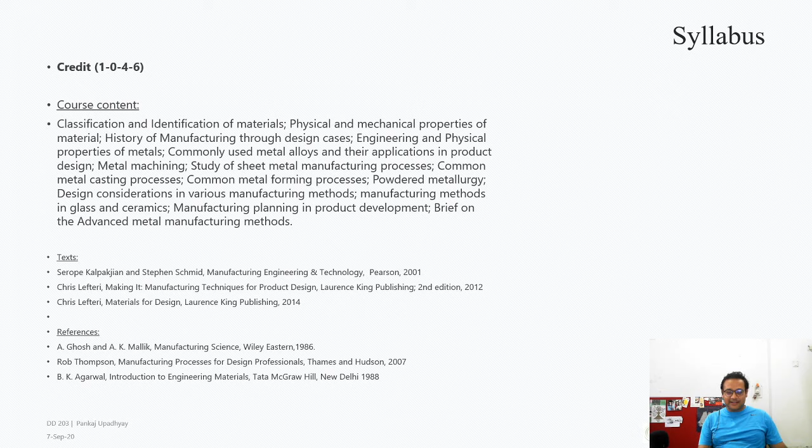Okay, let's move on to the plan of the course. So this is our schedule of the course. First and foremost, we have five 3-day modules.

So 3-day modules - obviously we will not do a whole full day of work. We'll have 1 hour of lectures, probably like this. If this seems to work, then we'll do it like this only. And what we will have is we'll try to cover certain topics in each of these modules.

Like the first module, we'll try to look at properties of materials, idea about tolerances, and we'll look at machining. Unfortunately, machining is something which really needs hands-on experience, but...

...somewhere in the mid ground, during our last to last batch - the batch who is currently in the 4th year - during that time, what we had done was we had gone through the whole workshop, and we had made some videos of the machines, how the machines work and what they look like, and we also made some videos about hand tools.

Jason was very kind enough to help me with the video shoot. So he made these videos and edited them, and I also think he's uploaded these videos in his YouTube channel, so subscribe to Jason I guess. And so these videos we can go through slowly, and we'll try to decipher what kind of tools these are and what uses they have.

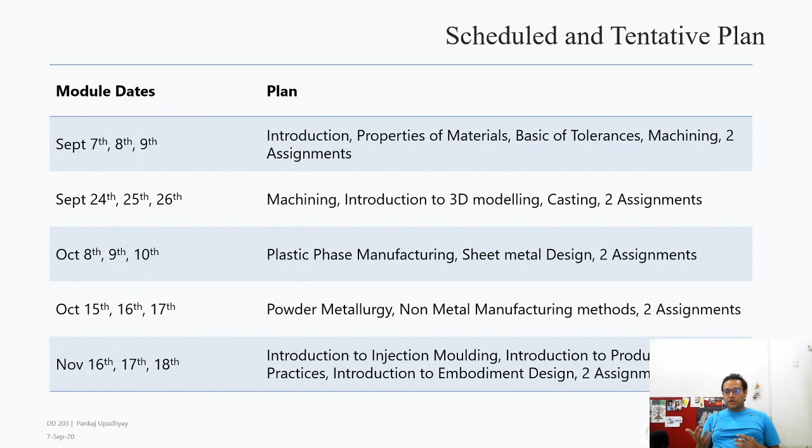So this is what I was thinking - instead of getting to do hands-on in the workshop, I have substituted that part of the learning process with an introduction to 3D modeling. I know there are other courses in your next semester which will introduce you to 3D modeling in depth, but here we will use this as a launch pad to get familiarized with the software and to also use it in some of the assignments.

So this will always give you an edge when you are doing some other kind of assignment in other courses. So we'll do 3D modeling a little bit - I'll do a tutorial session of one of these softwares. We'll do Fusion 360 because it is really accessible, really powerful, and it is free. How many of you know about Fusion 360?

Can we have some hands-on? Bhavika is asking if we can have some hands-on after you're back in campus. Oh no, that is Chaitanya asking. Chaitanya, make your own Gmail ID, man. What the hell?

Yeah, we can. I think this whole Corona thing, the effects of it, is going to spill over to the next semester also. We might have Saturdays working, so I can't really give you a promise that we will definitely be able to do this. I can't force you to do this, right?

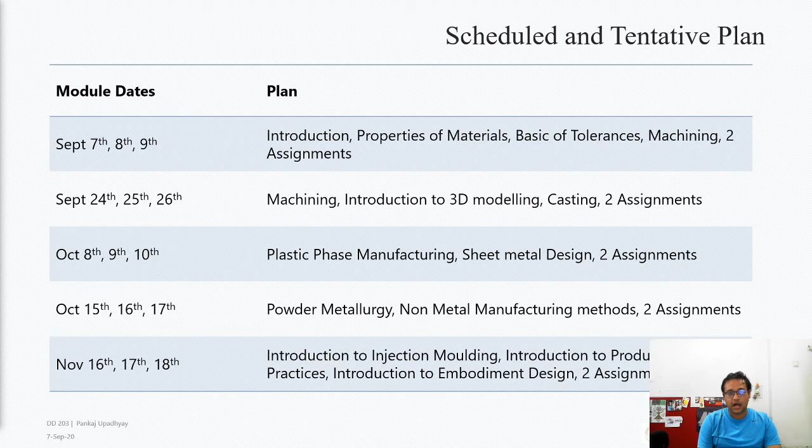We will have 2 quizzes sometime, and these will be like surprise quizzes. I still haven't figured out how we will do quizzes, because I honestly don't want you to Google it, since it'll be very simple questions based on whatever I've discussed in the lectures. Now that the lectures will be online, it'll be very easy for you to scrub through some videos and get the answer, but I don't want you to do that. I haven't figured out how I would enforce that, so if you have some ideas, do share.

I am right now thinking of using OneNote. I'll show you how it works.

Second, the AS grade will be based on overall performance. Even if you are scoring high marks because of submission of assignments and all of that, it doesn't guarantee you an AS grade even if you've done all the assignments. It will be based on your overall performance across all assignments. So if I see that out of the 10 assignments you've done 8 of them excellently, better than the rest of the class, or better than the best average or best submissions, then I will probably grade you an AS.

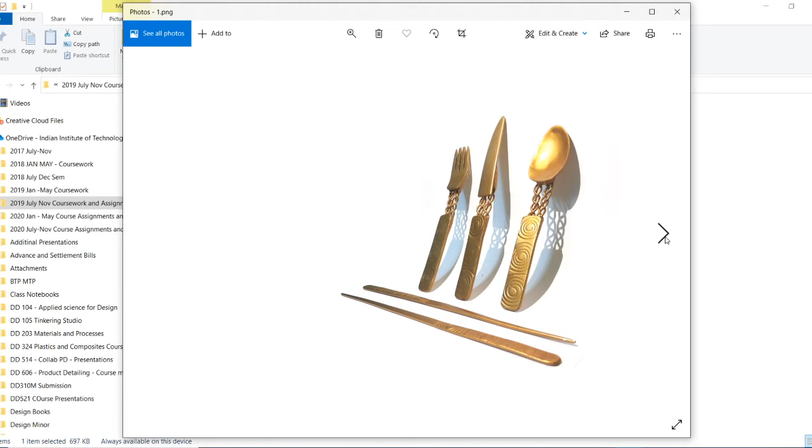So yeah, I'll show you what they've done in one of the assignments. Can you see this? Can you see this? Yeah, so this is a cutlery set that they've done. So let me pull up the other one.

Okay, so this was made in the workshop. This was one of the first kind of assignments, or rather I think the second assignment or something. Yeah, it's the day 3 assignment. So here this is like a spoon, and the idea was that you would make a cutlery set. I hope people can see, right?

You make a cutlery set of a spoon, a fork, and a knife, right? And they did something like this. It was quite interesting. This is one of the designs. There are many others, and they are very, very unique.

Then there are some assignments which were done for just understanding machining, like this one. This is, I think, a top. I don't know, you can see it. Against my shirt, I think you can see it, right? So it's like a machined top which you can just spin like this. These are the kind of simple assignments that we generally do.

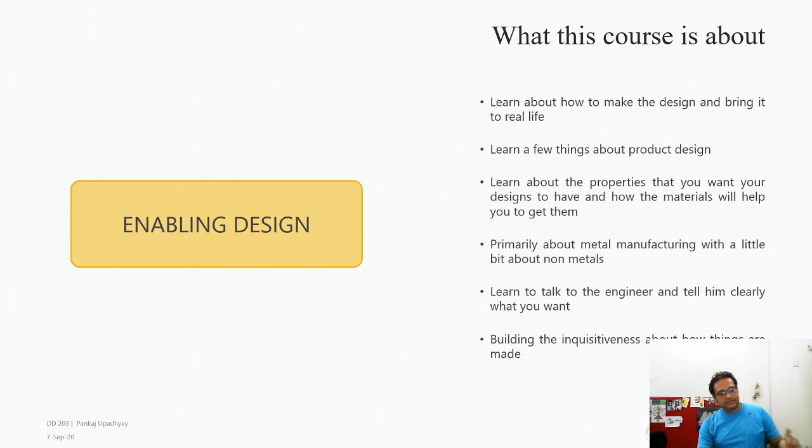So now we are getting properly into the territory of the class. Let's talk about materials. What are the different kinds of materials there are? Typically in the class I won't even say a word on this slide - I mean, what do you think there are? That's the kind of question I would raise, and I'll just go through the slides.

I think everybody knows this, right? Yeah, yeah, Chaitanya - algorithm is the problem. Yes.

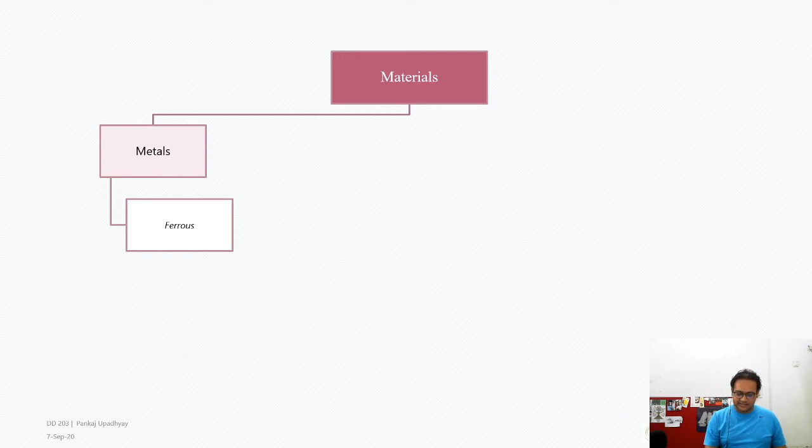So let's run through this - everybody knows this. What are the kinds of materials that are there? Some of you will have heard about some of these for the first time. Metals - there are two kinds primarily that I think you're all aware about: ferrous materials and non-ferrous materials. Non-ferrous are the ones which do not have Fe - Fe is iron. Iron is such a godly material, a bit of hyperbole, that it deserves a category of its own. And then there are others - copper, aluminium, and so on.

Although we are seeing aluminium more and more in the world lately, steel is something that drives the world. Steel is based on iron - it's an alloy of iron. So ferrous materials deserve a category of their own, that way.

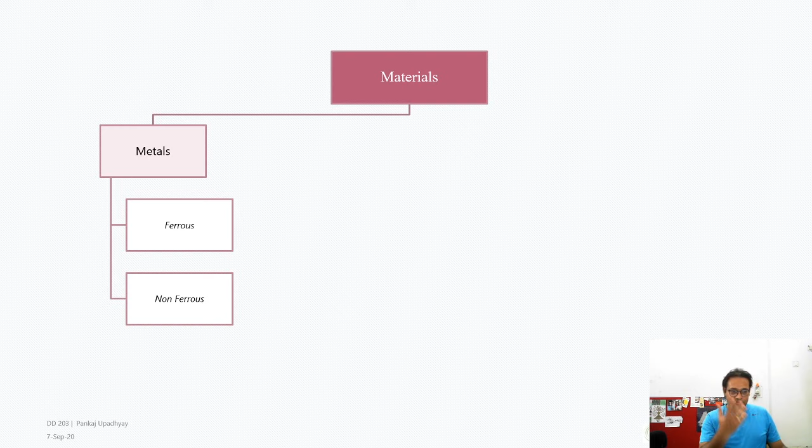There is a third category, which is amorphous metals. This is a bit of an advanced concept. Most ferrous and non-ferrous materials have something called a crystal structure - I think everybody knows about crystal structure. Crystal structure is how atoms in a particular material are arranged.

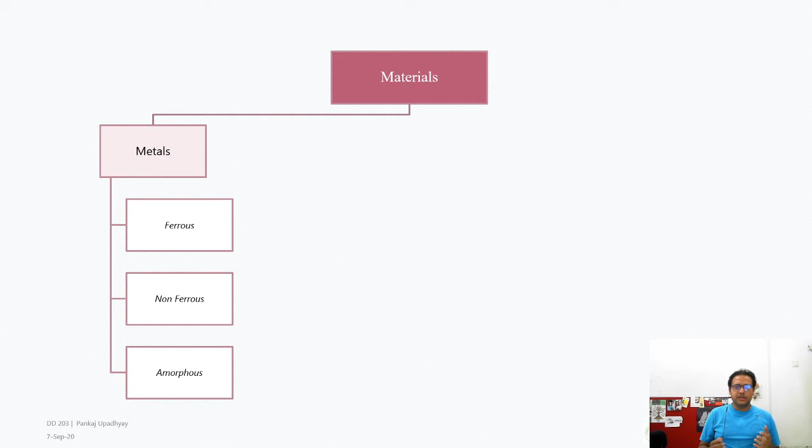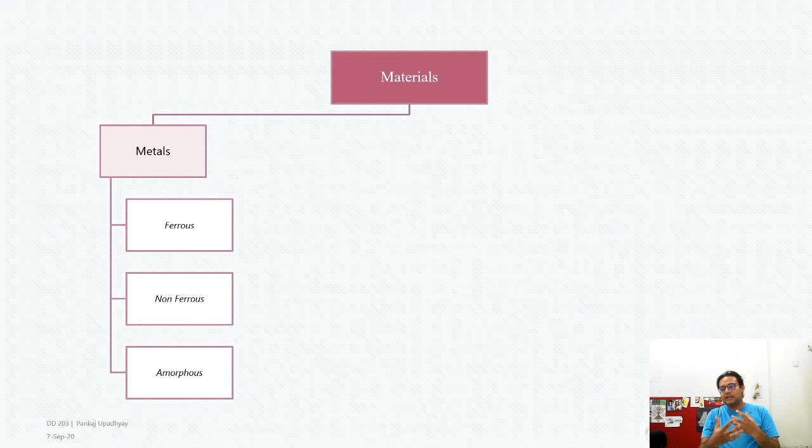You have learnt about this in class 8th, I think. Most metals are crystalline in nature, but some metals can be made amorphous using specific manufacturing processes. Amorphous materials do not have a large crystalline nature, or may have crystals on a very small scale, where that crystalline nature does not affect the properties, whereas in ferrous and non-ferrous materials the crystalline nature affects the properties.

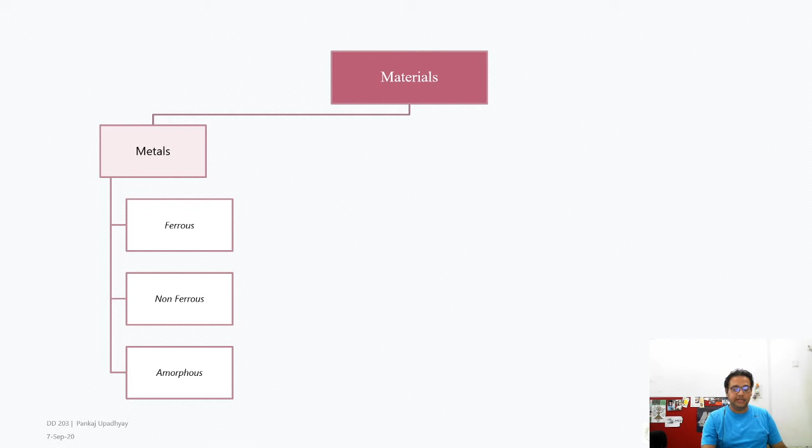I think that's why there's these three categories. Besides that, there is plastic of course. There are two types, I think everybody is aware of this: one is thermoset, one is thermoplastic.

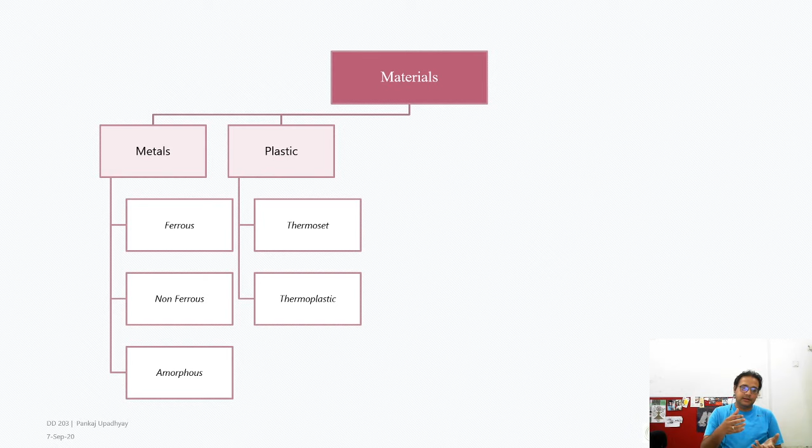It's very simple. Thermosets are plastics which undergo a chemical process when becoming solid - that's a layman's way of explaining it. Thermoplastics, however, do not undergo a fully chemical process when becoming solid. They have a liquidy plastic phase, let's call it plastic phase, and they have a solid phase. So they transition between these two.

These are primarily polymers. Plastics are primarily polymers. There is another category which is elastomers. Mers is basically a way of defining these chemical chains which are very long in nature - a repeated chemical element that forms a long chain, and that is a polymer. A Mer is a single thing, and polymer is a multiple of the Mer. So Mer is the chemical compound.

So thermosets are polymers which undergo a chemical change when becoming solid. A typical example that most of you are aware of is epoxy - if you've seen M-seal, that's an epoxy. You have two different components, a hardener and something else, which you mix together, and a chemical process happens and it becomes solid. That's a thermoset plastic.

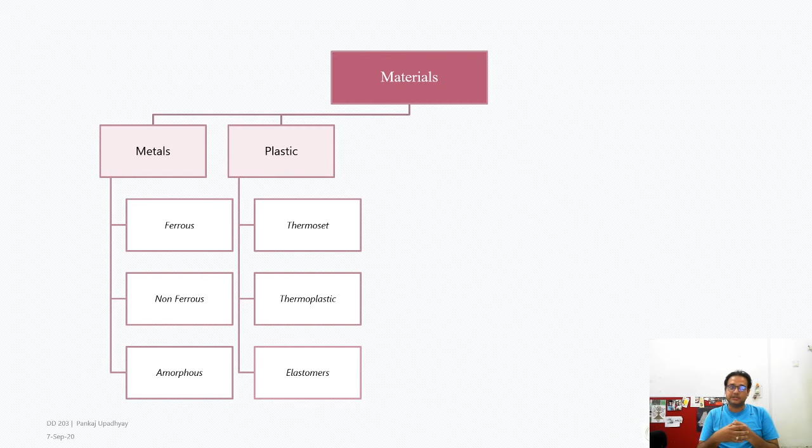Thermoplastic is, I think you've heard mostly like polypropylene and ABS - these kinds of names are thermoplastics. These are typically used in injection molding. However, thermosets can also be used, but the process is slightly different.

Elastomers are the third thing - things like polyurethane, silicones, and rubber. Natural rubber could also be called an elastomer. Why is Vaibhav saying hydrocarbons? I think, yeah, I understand.

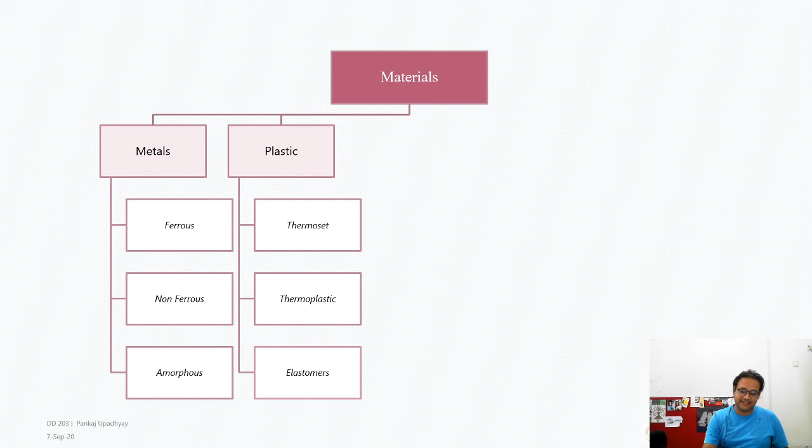Besides that, there are some naturally existing materials which are extensively used in design and engineering - these are glass, ceramics, and refractory materials. Glass, I'm sure everybody is aware of. Ceramics are something very close to glass. You will probably have food and cutlery things made out of ceramics.

Then refractory materials are a third kind. These materials have a very high melting point, much higher than metals. So refractory materials can be used to cast or hold liquid metals - they don't disintegrate when holding liquid metal. These are used extensively in the casting industry, for lining these containers, where liquid metal is stored.

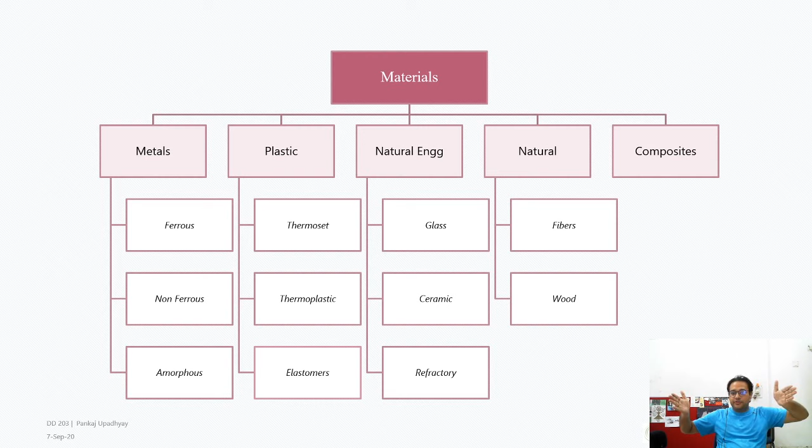The next are purely natural elements used in design and engineering, like fibers, wood, and so on - we'll not go into that. But the final category, again people are aware of things like this, are composites. Composites are when you have two different kinds of materials joined together, and they work homogeneously as one material.

One example - yes, we don't have a ceramics lab yet, but we have the space for a ceramics lab, and I think we were trying to set it up, answering Pranav's question about whether we have a ceramics lab and if there's a plan to set it up. There is a plan to set it up, there is space allocated for it, and there was some problem with the budget in the past year or so, because of which we couldn't do it. But me and Supradeep sir and a few others were really keen on getting the ball rolling.

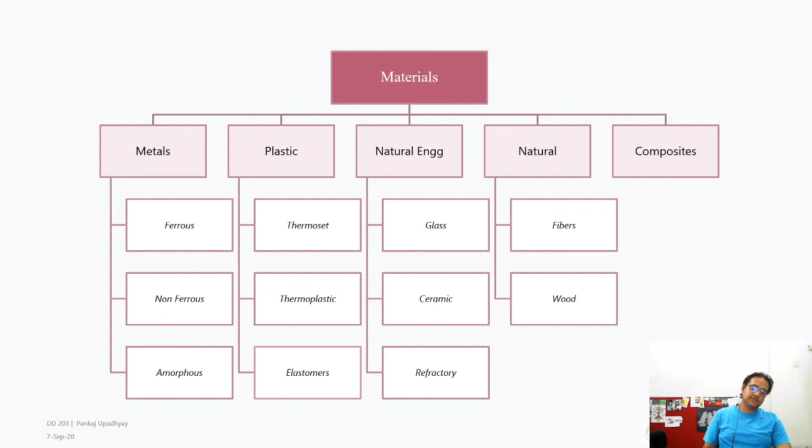But I really can't comment on it right now because I don't know what is the status of that.

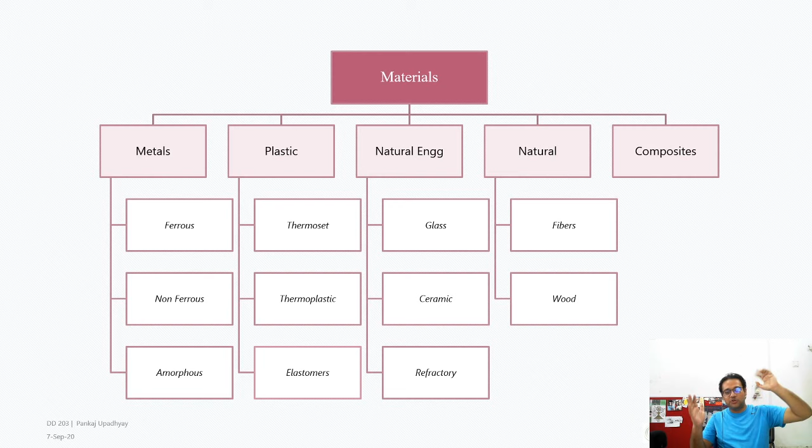Anyway, moving forward, composites are when two materials are used together and they perform as a single kind of material. Okay, let's go forward.

What is manufacturing? I think again this is one of those slides where it is an interactive slide. It's not supposed to be for me to talk on.

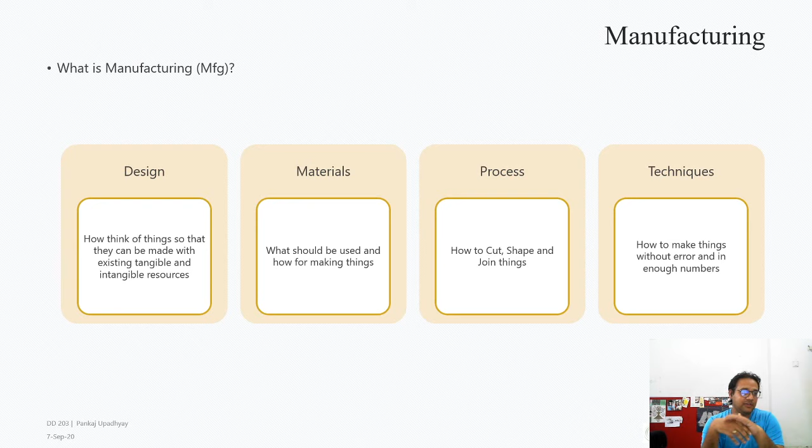So what is manufacturing? Manufacturing is slightly hard to define. It's just not making things, it's not just that. It's about how you think about making things. It's how to make intangible things tangible, right? It's about understanding of materials, what should be used to make these things so that it's the best one possible, and at the cheapest possible cost. And it's about the processes.

It's about how do you cut, shape, or join various things, and finally there is also a component of techniques. What are the best ways of doing it? What are the good ways of doing it? So these four aspects: design, materials, processes, and techniques combine together to form the knowledge base of manufacturing science and engineering.

Okay, right. So let's do a little bit of this. This series of slides presents you about history of manufacturing. I think you will see most of the slides have some kind of question.

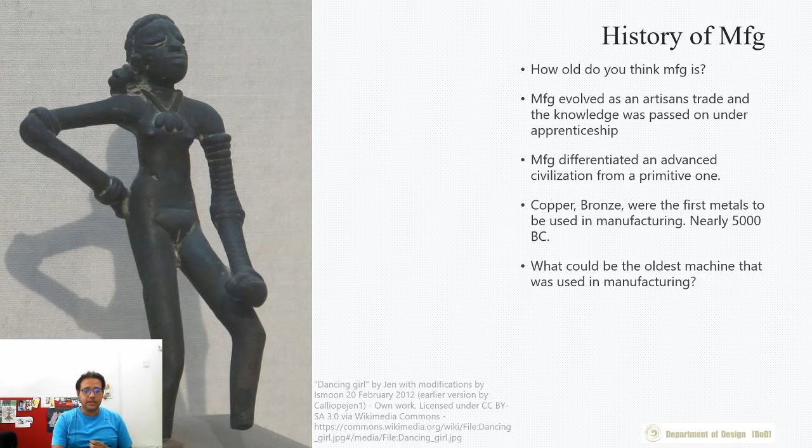India has a very interesting relationship and history of manufacturing. And it's very interesting to read India's contribution to the whole manufacturing knowledge. So one of the things India was very, very famous for was something called steel, basically, right?

Okay, I'm sorry, Pranay. I think I'll just, give me a second. I'll just make sure that such accidents don't happen in the future.

Right, okay. Going back, I'm sure everyone's fine. Yeah.

So when I say India, back then India wasn't really India, right? So let's not call it India - India is a very political boundary. This whole South Asian geography was famous for Damascus wootz steel, which was exported from India to somewhere in the Middle East, like existing Syria, and they made these amazing legendary blades. Referencing pop culture, the Valyrian steel from Game of Thrones was inspired by this idea of Damascus wootz steel blades, so this is only a figure - nobody really knows exactly what it looked like. Now if you do a Google search and see these knife-making processes, some people claim they have made a Damascus steel knife. Devaditya suddenly woke up - yes, the Indian subcontinent is what I meant, right?

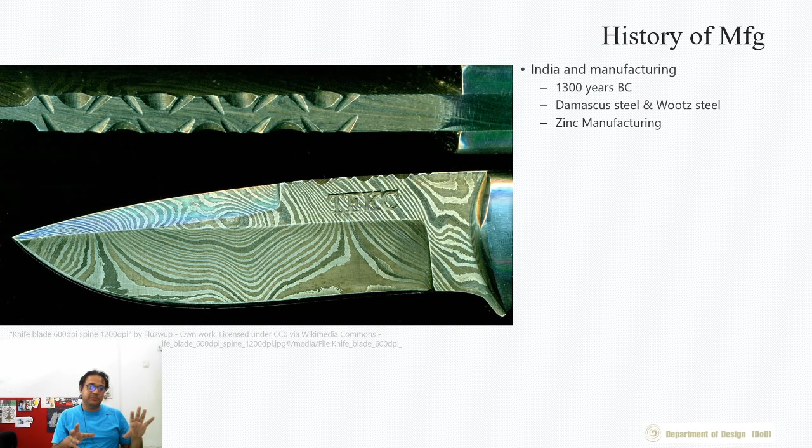Anyway, moving forward, so 5000 to 4000 BC is when we understand manufacturing started, and primarily during that time people used to manipulate meteoritic ore - meteors that had fallen into the ground, which had a lot of impure materials that could be manipulated in some manner to manufacture certain things.

Then slowly pottery became one of the prime ways to manufacture things. Pottery is done by manipulating clay, and then you could fire that clay - heat it up to a certain temperature so it would harden. There would be some chemical processes inside, and it would become like ceramic. Terracotta was, I think, the first type made, fired at a lower temperature than ceramics, which require much higher temperature. So once people figured out how to reach those high temperatures, they could make ceramics and so on.

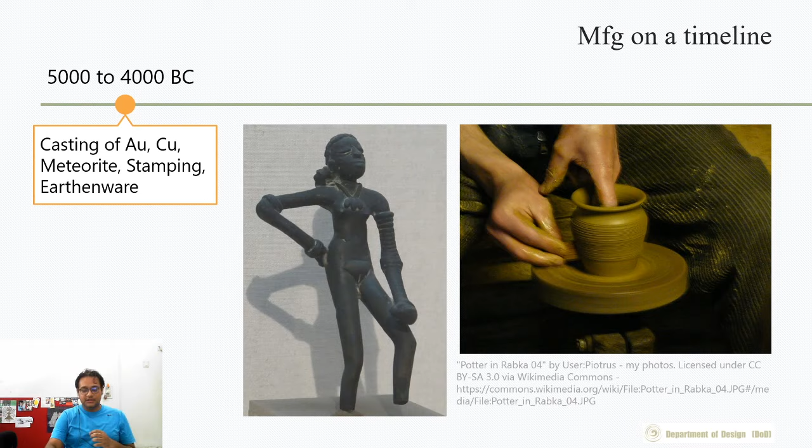As knowledge around the world grew about how to manufacture things, people slowly started making better quality products, faster, and so on. The other initial historical manufacturing processes were related to wood - carpentry was one of the things that drove manufacturing during that time.

So think about this - how would this idea help an animator, a person who's animating? Say you're designing a village in 3000 BC and you're supposed to make the house look like a 3000 BC year old house. What kind of materials would you use to build that house? As an animator you'd have to think about what manufacturing processes were available at that time and what could have been done with those processes, and with that you could slowly build up this world. That's an interesting way of doing it.

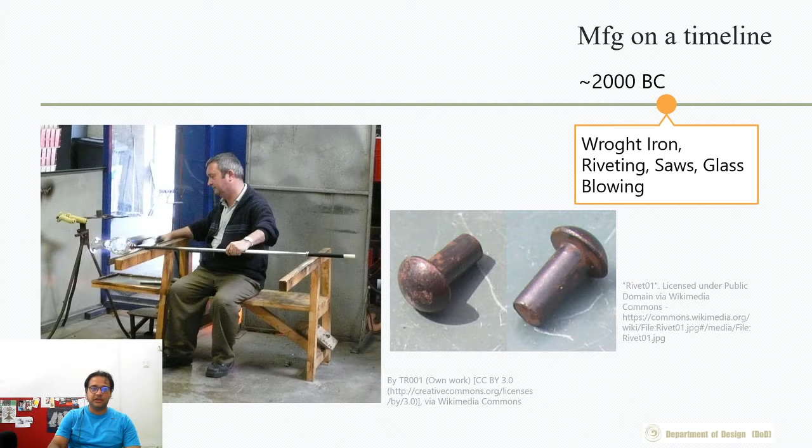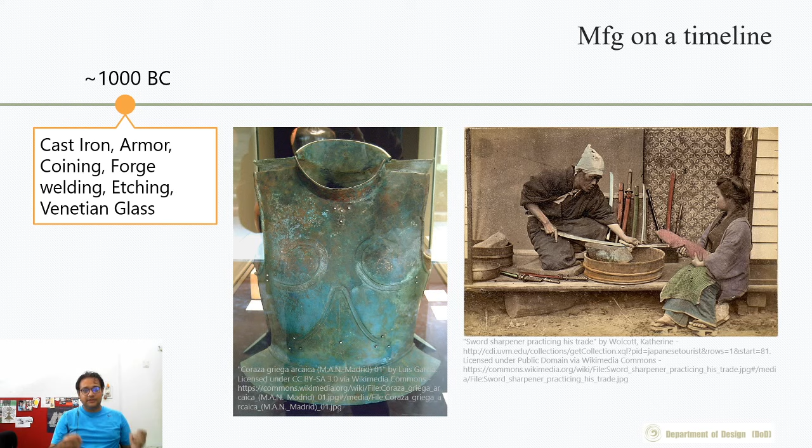By that time also, China was one of the places where porcelain trade was booming. Porcelain and ceramics were one of the things that were transported through the Silk Road, which went from China to somewhere in the west.

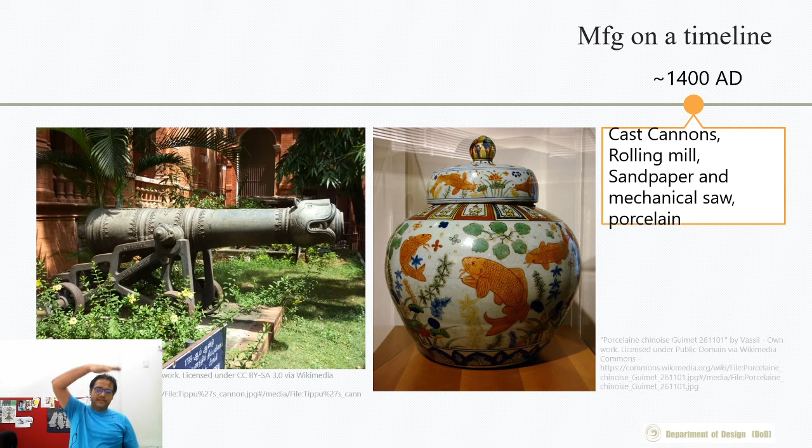Then we come to the modern age, and we started having these kinds of manufacturing processes that we're more familiar with today, like the lathe machine, the milling machine, and so on. There are very interesting accounts of how manufacturing processes helped people in war. It's strange that during war times, somehow manufacturing processes get a boost, because you have to make things for the troops faster and cheaper. So people were forced to think of ingenious ways of manipulating things, and very interesting technological breakthroughs in manufacturing happened during that time.

One interesting example is the production process before the case of Eli Whitney. Before his time, the primary way of manufacturing weapons was that one person would make each and every part, grind it, cut it, and join it together themselves. Eli Whitney, in his factory, tried making muskets, these large guns used in the American Civil War. The way he made muskets was that he could interchange parts of one musket with another, he standardized the parts of these guns. Because of that, it became possible to repair things more easily, manufacture more things, and ensure that one part fits on another part that was made. This was a breakthrough in production engineering.

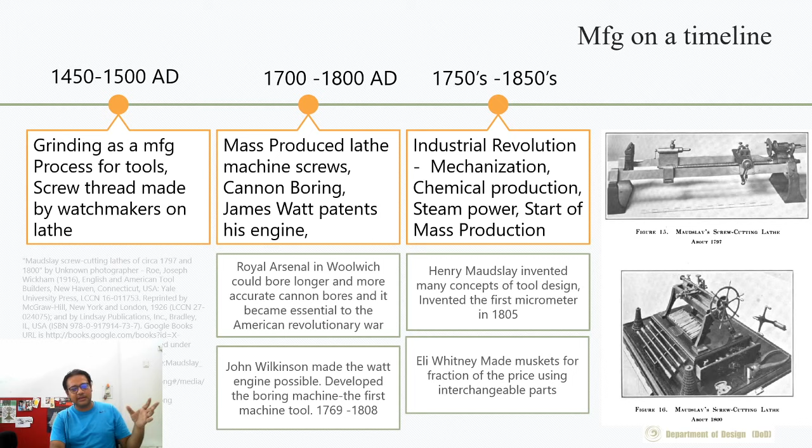There are countless examples of historical stories of how manufacturing came to be, and countless examples of how war affected innovation around manufacturing processes. We won't go deep into it, but it's an interesting read if you want to search for it. Finally, we come to the modern age, and the thing that drives innovation in the manufacturing process is three things: it has to be faster, it has to be cheaper, it has to be better than before.

If you are able to do these three things, then that's how progress is made in the processes, right? So by the 1800s and all that, we had these very interesting manufacturing processes called shaping and milling and so on and so forth. And by the 1950s, we really understood the materials and science behind it, and things like EDM, electrical discharge machining, TIG welding, tungsten inert gas welding, and so on came about.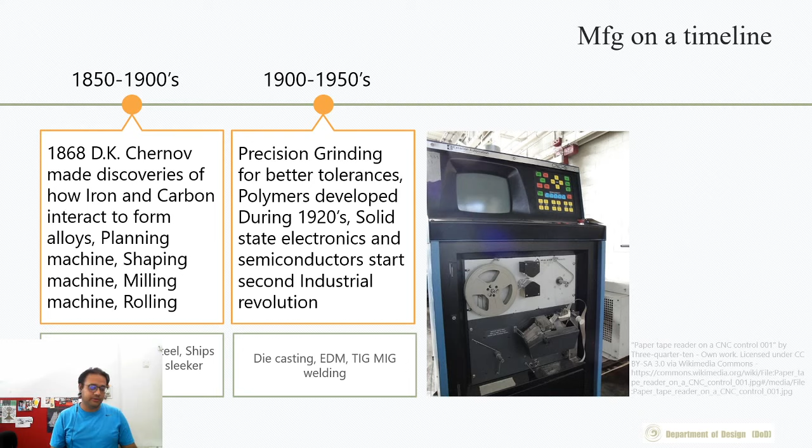Okay, and finally we come to the newer age, and now I think the biggest revolution in manufacturing which is happening is 3D printing, although it seems like it's fairly old now, right? So it's 2020, the corona year, and how many years has it been since 3D printing? Like 50 years? That's what I'm guessing. I'm not sure, correct me if I'm wrong.

One of the very interesting, pivotal developments in the recent era of manufacturing is in production technology with something called the Toyota Production System. Toyota is the company which makes cars, right? And they've had a huge impact on the manufacturing industry, primarily in the way of managing production. I don't know if you've heard about these terms, but there is something called 5S of organizing your inventory. These are Japanese words: Seiri, Seiton, Seiketsu, Shitsuke, and something else. They developed this kind of philosophy which has been implemented world over. So it's a pivotal moment, the Toyota Production System.

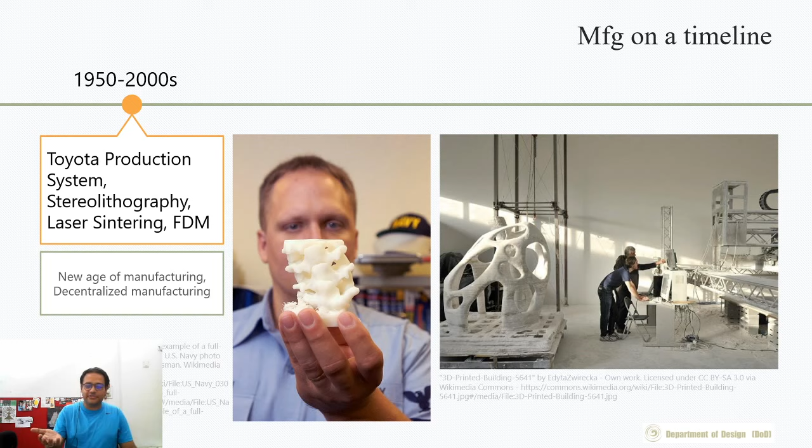There is some discussion in ethics around the manufacturing process, the ethics and responsibility of manufacturing, which I think this course shouldn't really go into. But this is something that interested students can pursue, read about, and get good knowledge on.

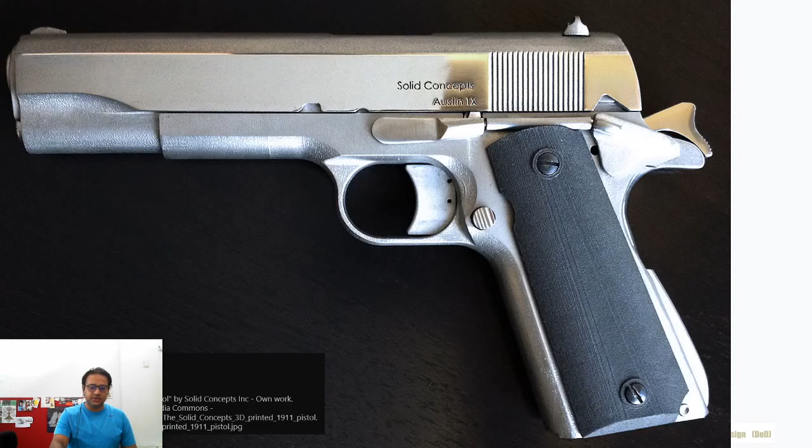So this is an example - that one was plastics, and this is metal. You could easily 3D print metal, and as soon as you have the digital data, you basically have the physical part. So it makes it rather easier for people to steal data and get away with bad things.

And yeah, so right, we should do like a breather right now. Okay, so I have a few questions here. I think I can answer them.

The first one is, what's the difference between porcelain and ceramic? They are basically the same thing. What Pranay is saying is fairly correct - it depends on the material or composition, and the temperature at which you fire it, or bake it. The way ceramics are made is something like bread: you make a dough, you give the shape to the dough, and you put it in an oven and wait for it to bake. Once it bakes, it becomes hard. So that is how ceramics are made - that's an 'explain it like I'm five' kind of explanation.

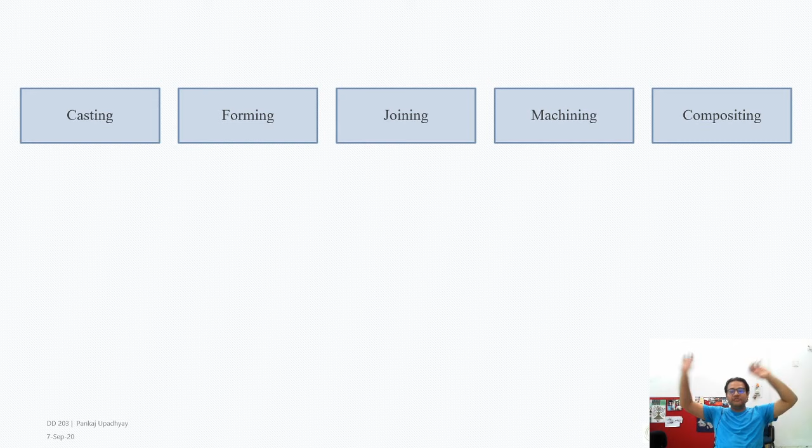Let's move forward and go to the next slide. If we categorize manufacturing processes, there are 5 of these categories.

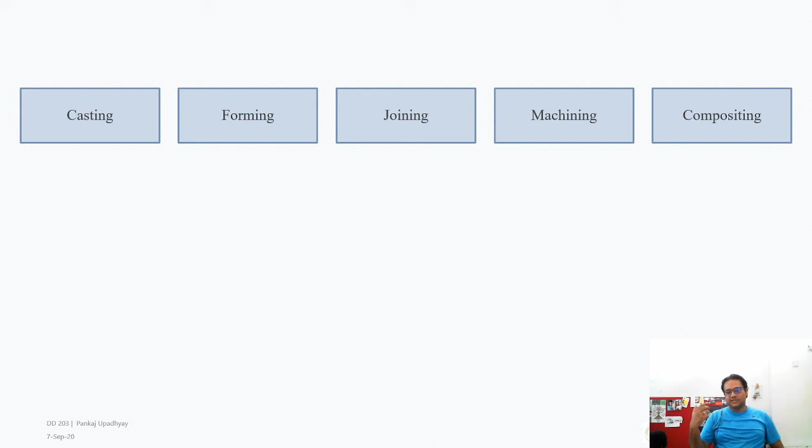We can clearly see, I think besides that, there's definitely something else which is there. This is not be-all and end-all, but this is one way of categorizing. With these categories we can see when we were able to do this process for a certain type of material, or the subsidiary processes of casting - when were we able to do it. For example, we were able to cast gold and copper and meteoritic ores by around 4000 BC, which is really 6000 years ago from now. We were able to do this, and we were able to make wrought iron by 2000 BC and so on.

And something like die casting - have you seen those good quality Hot Wheels cars, not the cheap ones, but the good quality ones, they are made with metal, I think aluminum. These are made using a process called die casting. Even if you go into these collectible toy sites, you can find these die cast cars.

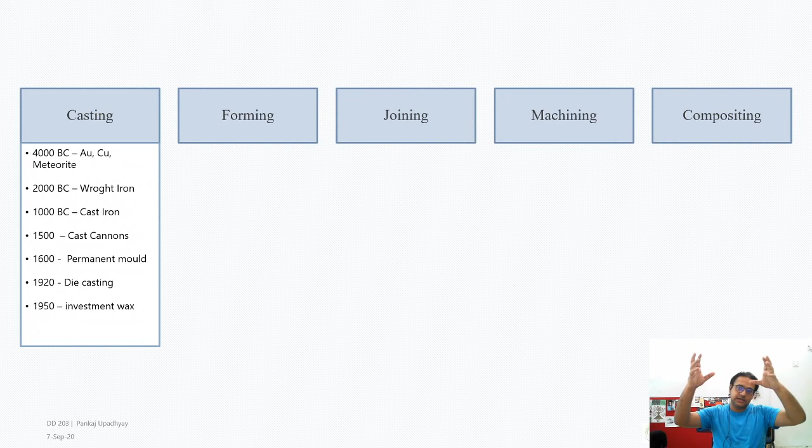Automotive designers would be very interested in this - they generally get these kinds of small toys for their desks. The way they are made is there is a die, meaning there's an A part and a B part, and they close together, and the gap created inside, you pour metal into it, and when you remove it, the metal comes out. These two dies have to be made with certain material which doesn't get degraded with liquid metal when you put it inside. That kind of process is called die casting - we'll speak about it in detail later on. That happened very recently, actually.

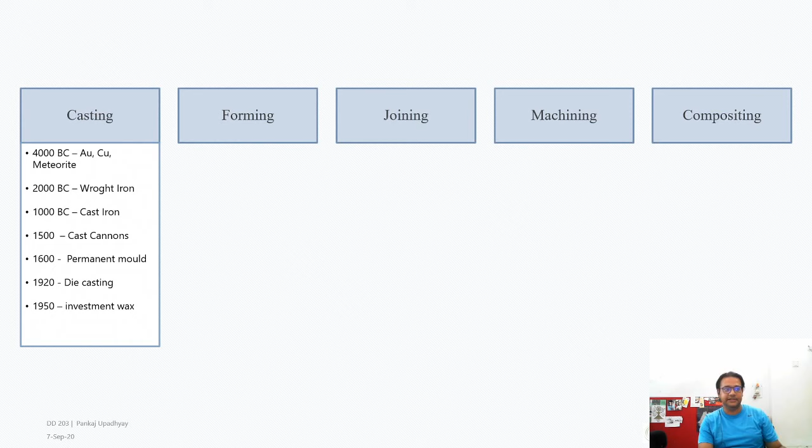Similarly, forming is a way of manipulating metal when it is in a soft state. When you heat metal to a red hot state it becomes softer, so that when it's soft you could hammer it and give it a shape - that process is called forming. By the way it sounds itself, it's fairly rudimentary, you just heat material and hammer it. That process is a very old one, but slowly over time we learned enough about it that we made some exotic forming processes, like something called an HIP process - hydrostatic, isostatic, I forgot the full form - but HIP process is used for forming.

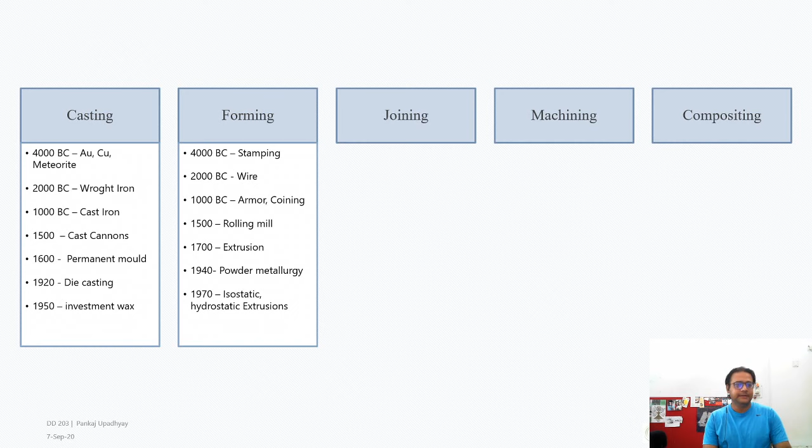Anyway, let's go forward - so joining, the ability to join. Die casting is not profitable for bigger versions, asks Shreya. It is.

So let's say the size of chairs, you could die cast those. Beyond that, I'm not fully aware if very large things, like ship propellers, that size, whether it can be die cast. Probably not, I would say, because that would mean the whole die needs to be that huge. But let's say the size of engine blocks, definitely.

Engine blocks are not die casted, but I think it's a different kind of casting process. I think it's sand casting, but maybe over the course of time things have changed, and maybe now it is die casting.

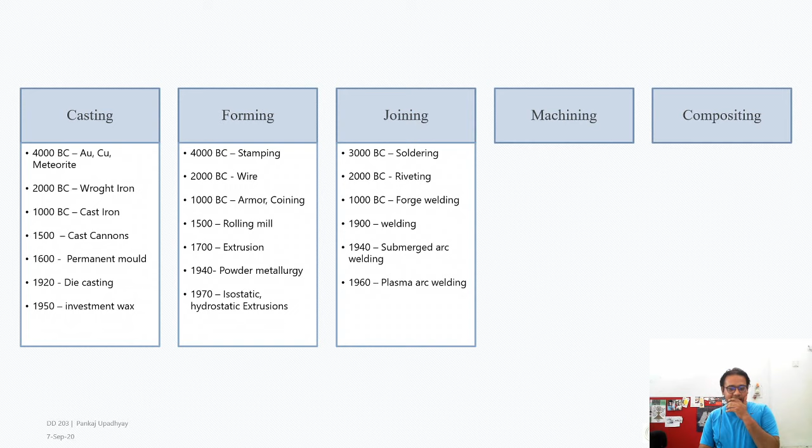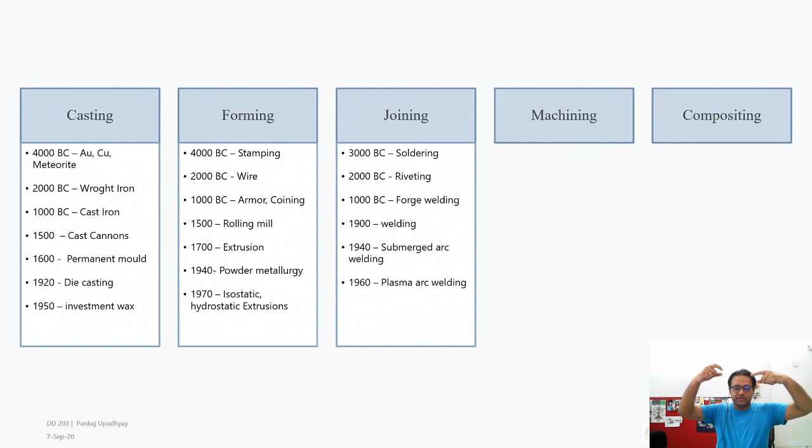Looking at the joining process, the way you join metal hasn't changed: you melt both ends, join it, and wait for it to cool down. That's joining metal. Now you could do a few more things, like instead of melting both ends and putting it together, I melt both ends and put a third material in between, and then join it.

That's one way. The other way is I don't melt them at all. I put a third material in between, so that it bonds with both these materials and works properly. That third way is called soldering, and the rest, joining material by melting, is welding.

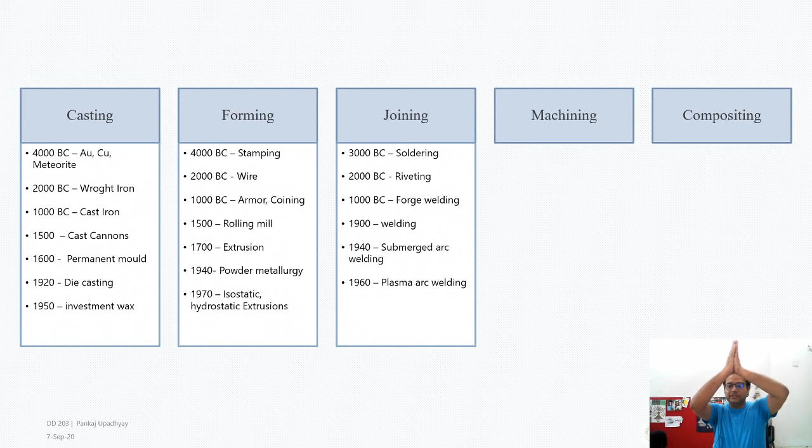Now there are different ways of welding, like what you can see here is something called forge welding. If you take two pieces of material, put them together and really hammer the hell out of this thing, you put a lot of force, then you will have made enough frictional heat between these two that it flows into each other. So it has forged together.

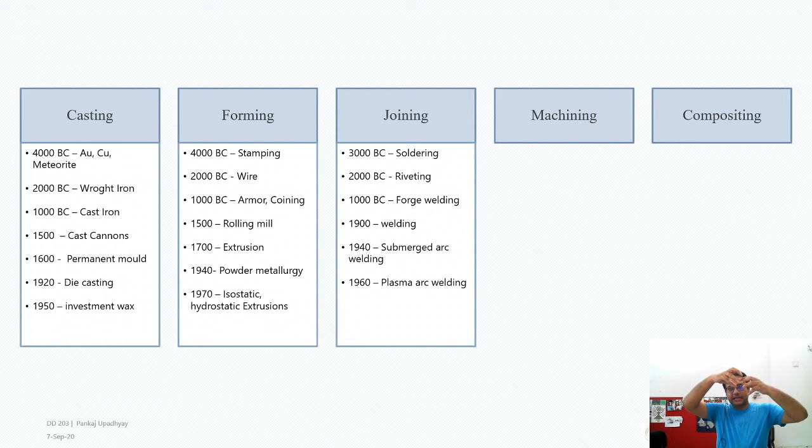Joining plus casting, well, no, what I was saying was something like welding. So normal welding, where you have these two materials, and when you put that welding rod there, what it actually does is it heats up that place locally, and it heats up enough that it melts it a little bit.

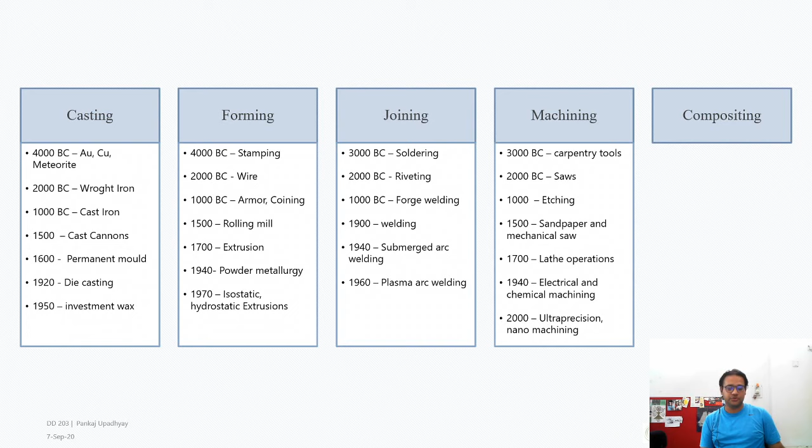Then machining is the way of removing material. How long has the stream been going for? Sorry, let me just check. Okay, I think we should stop in some time. This has been very long. Just give me a second.

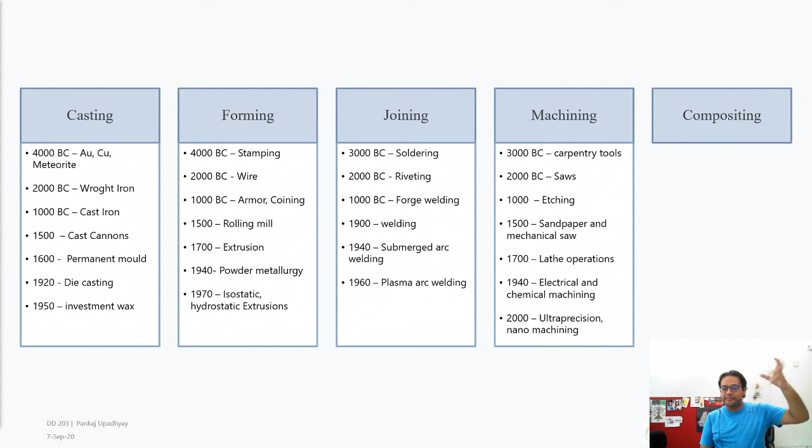So machining is the way of removing material, and you can remove material by ensuring that one part really spins very fast, or moves very fast, while the other part is there. So it moves very fast and it cuts. That is the way a lathe works. You have a spinning object, and you put a cutting material which is harder and stronger than this base material, and it can cut through.

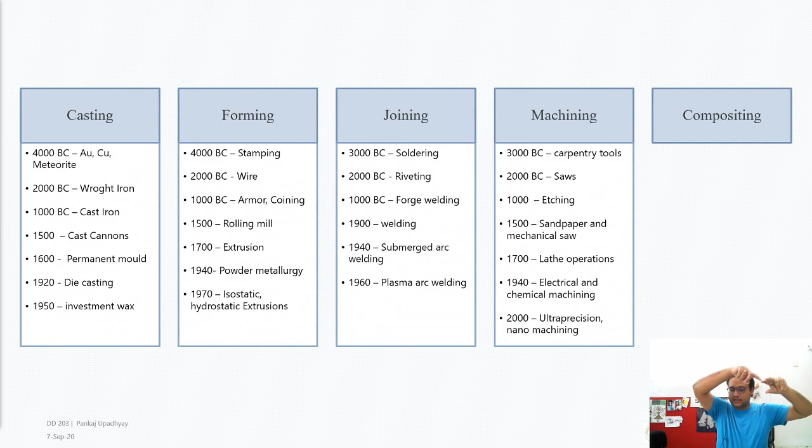So you've seen a lathe machine work, it's a very common process. I think you have seen it.

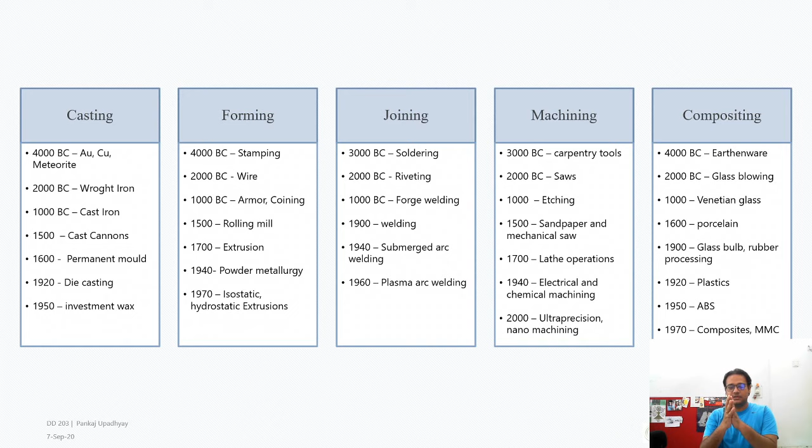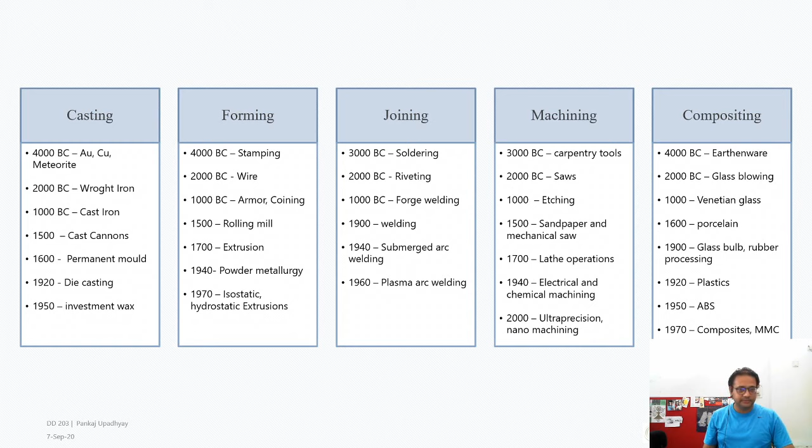Finally, compositing is the way of, as I said, taking two different materials with different properties and combining them together in a homogeneous fashion, such that the resultant material has a different property of its own, a better property than these two individual components. So everything in non-metal materials, such as most things like porcelain, ceramics and glass, use this kind of manufacturing process, and it's fairly old. So this slide gives you that idea.

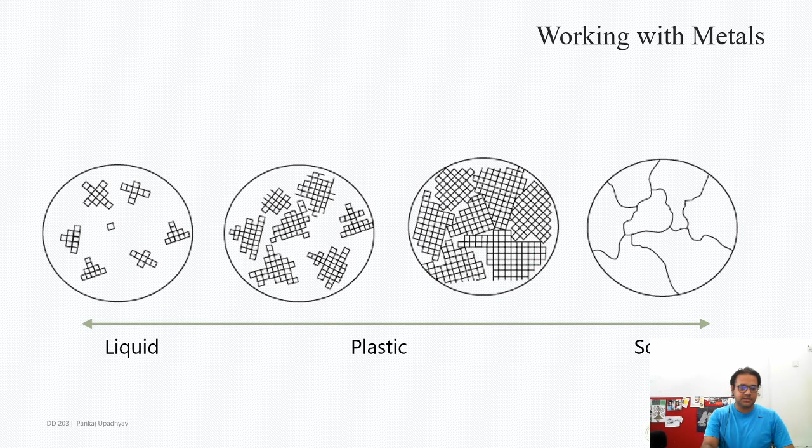It's the first assignment. This is the day one assignment, which is product teardown. I'll show you examples. The idea is that you take a product and you open it up.

Okay, open it up to individual parts, and you figure out how as a whole the product was made, assembled basically, and how each and every part was made.

What do you think each and every part would have been made with? You can do specific processes directly, you can say something like this was die casted, or if you don't know, just get an understanding based on the shape of the material, based on the shape of the part, and think, okay, I think this was made with casting. That much information is fine.

So you have to give three types of information for each part. First is how each of these parts were made. Second thing you have to give is what material this is, most likely - it would either be plastic, steel or aluminum, or in some cases brass, copper, things like that. But I'll be slightly more lenient in marking you higher if you can figure out the exact material.

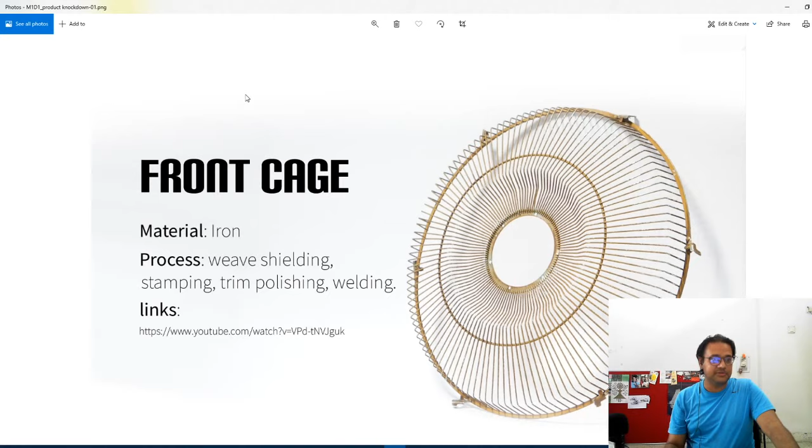So he took the photograph like this, and he said the material is iron, which is obviously wrong. The material is not iron - iron is a chemical element, Fe, pure iron. Most of these things are made with steel. I would have been okay with him saying it is steel, but iron is not correct.

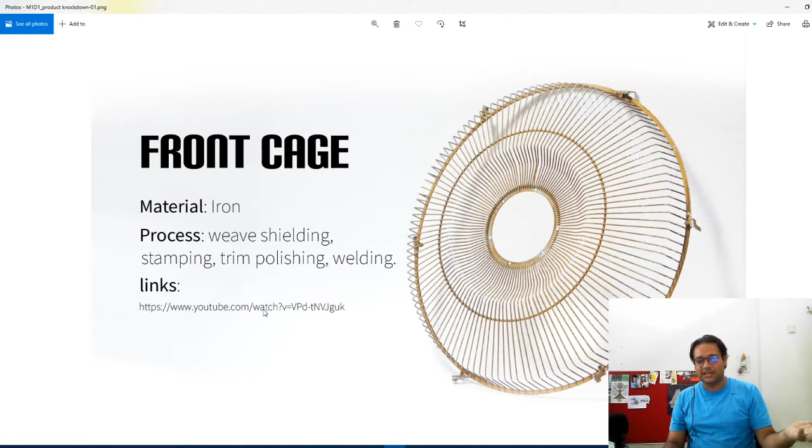Let's go forward. So in the earlier assignment, I had asked them to figure out the manufacturing process with which this product is made, find a video of it on YouTube, and link that video. So this is what he's done - for you, that's not important. What I generally found is I ended up with the same kind of video. I was expecting people would show me something very interesting, but well, okay.

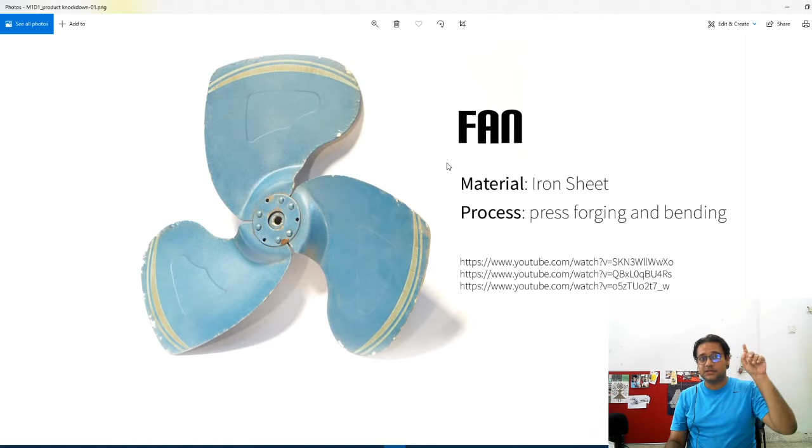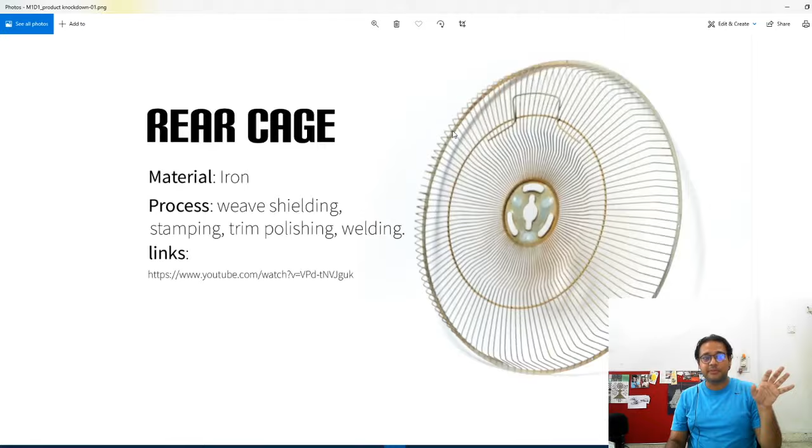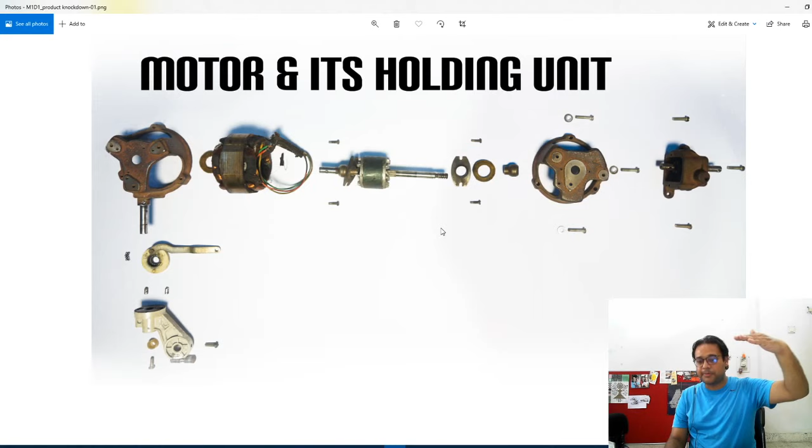But some things like this are not made in a single step, they're made within several steps. So you have to tell me about all of these steps. Okay, this is the material used. These are the 5 different types of materials used in this part. This is how this part is manufactured. It's going to be slightly difficult, and you need to rack your brain on this.

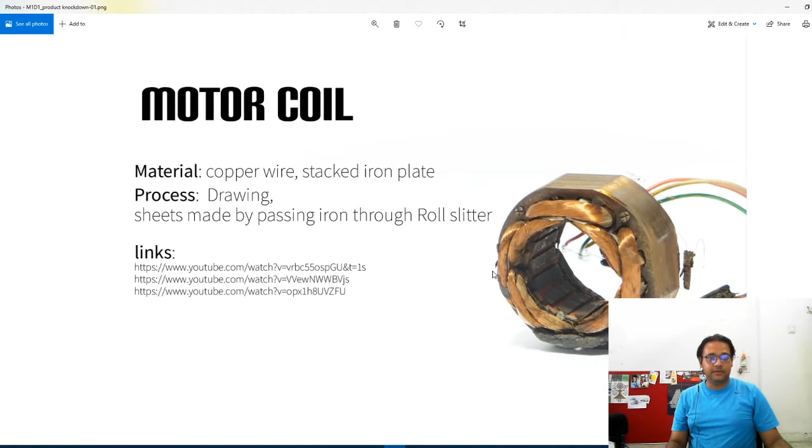You can see the pictures, and they're good pictures. It's clear and I can show you. That means they are good pictures, right? So let's see something else. What does he have here?

Right, so this one is also the same thing, it wasn't complete in a single slide, so he made like 3 images. So let's see somebody else's example.

Let's see Joel. What is this? Not this. Ash. Give me a second. Right, okay, let's see this guy.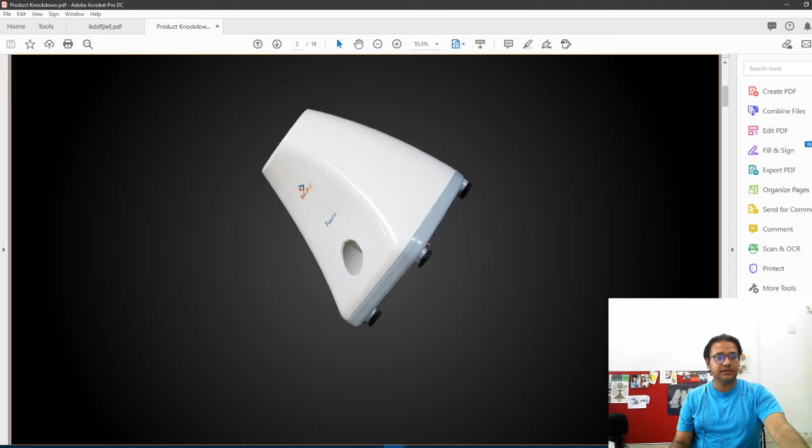So Prakash did a breakdown of a mixer grinder. Earlier this was done by 2 people, so let's just go through what they have done.

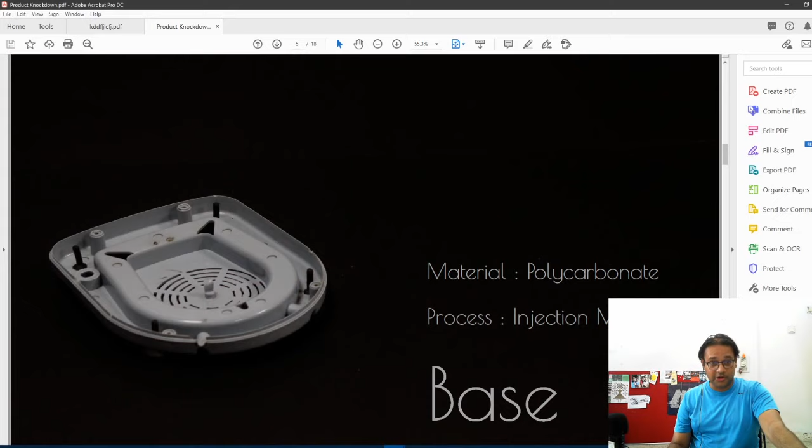So he's done this, this is the body, made with polycarbonate, injection molding polycarbonate, which is wrong, right? So this is not made with polycarbonate. Most likely it is made with polypropylene. If it is a high quality product, most likely it would be made out of ABS. Okay, so right.

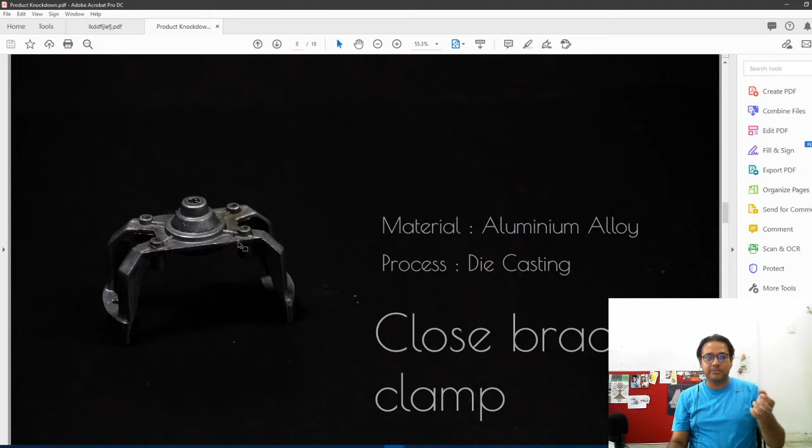So you can see in these photographs there is a problem, like for example the details towards the inner part of the product are not clearly visible. I don't want this to happen in the ones you submit. So if you end up with a photograph where you can't make out the details towards the end or under the product, put a small reflector on one side, and you'll get reflections on this. By reflector I mean a white piece of paper. Take a white piece of paper, put it near that, the reflected light will shine on this part and you'll be able to see these details more clearly.

I think you have a product photography course also, I think you do, no? Okay, okay.

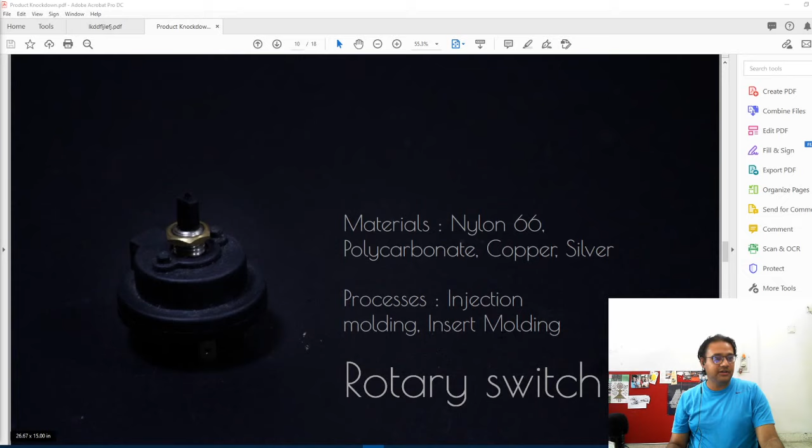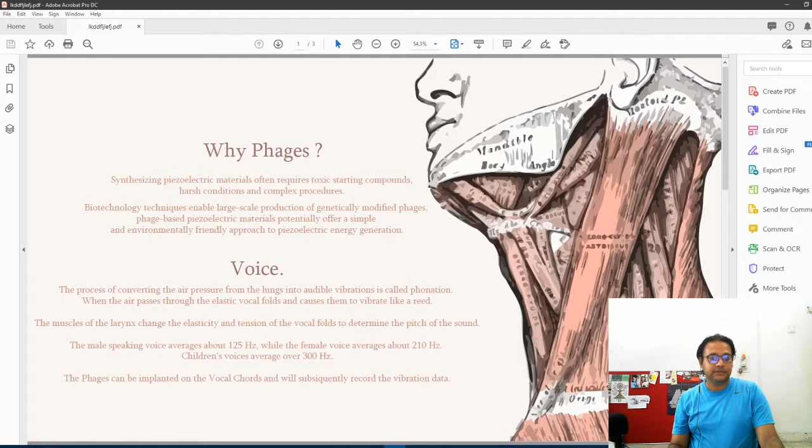Right, okay, so let's move on. Everybody has done it in a very interesting manner, let's take a look at this.

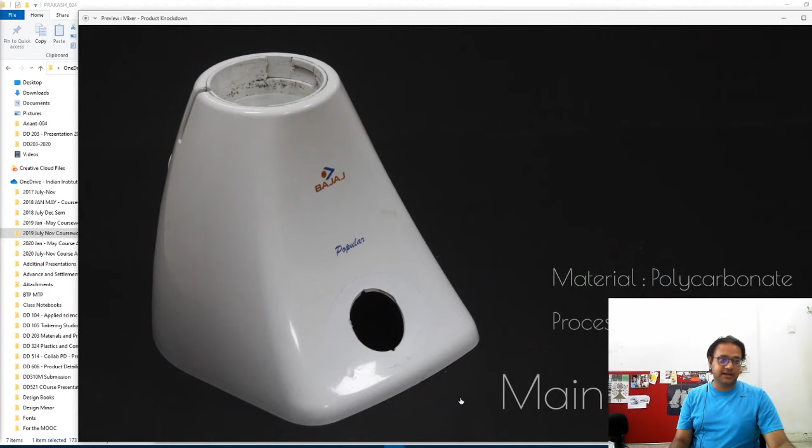Let's do, yeah. So he's done this, right? So that's what he's done. And yeah, so you go through all of this.

I think Prakash got some good marks because he was able to figure out these different screws in that. See, it's not just about knowing the way it is manufactured. If you are able to find new knowledge that we did not discuss in class, or something that you realized when searching for this product, that counts. That counts as learning in this course, and you have to put that learning somewhere. And if I see that this guy has put in the effort needed, then yeah, I'll be happy.

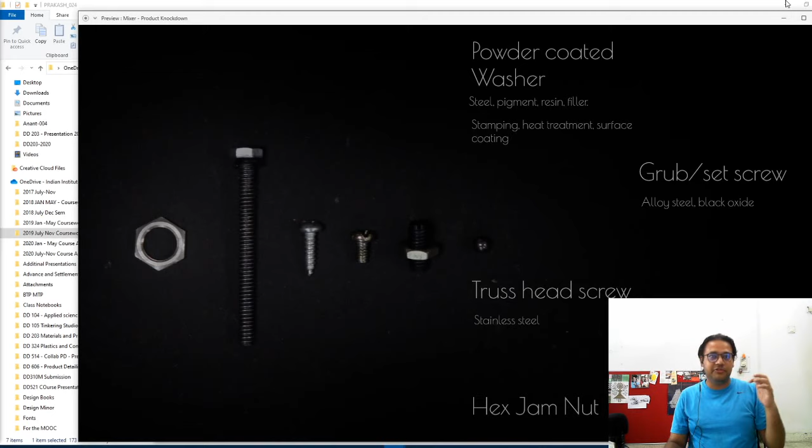Okay, so let's play this again once. It was quite interesting. So this is the product and this is the exploded view. That's why the explode, it was fun.